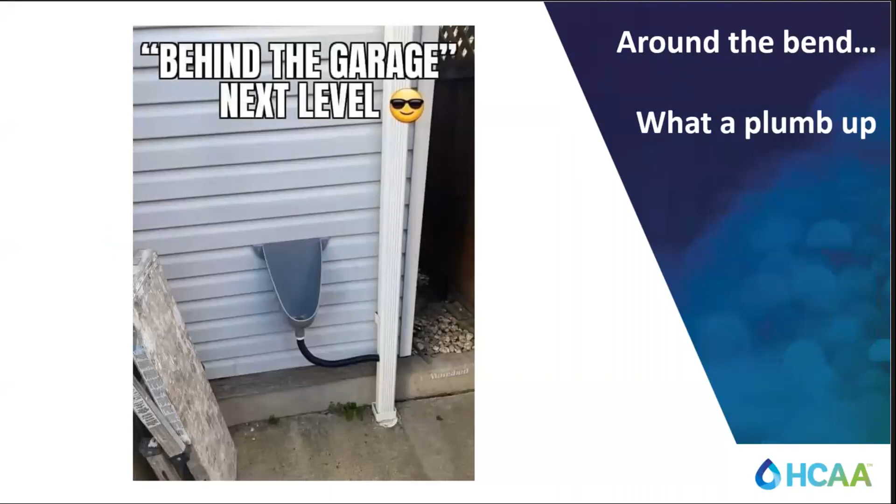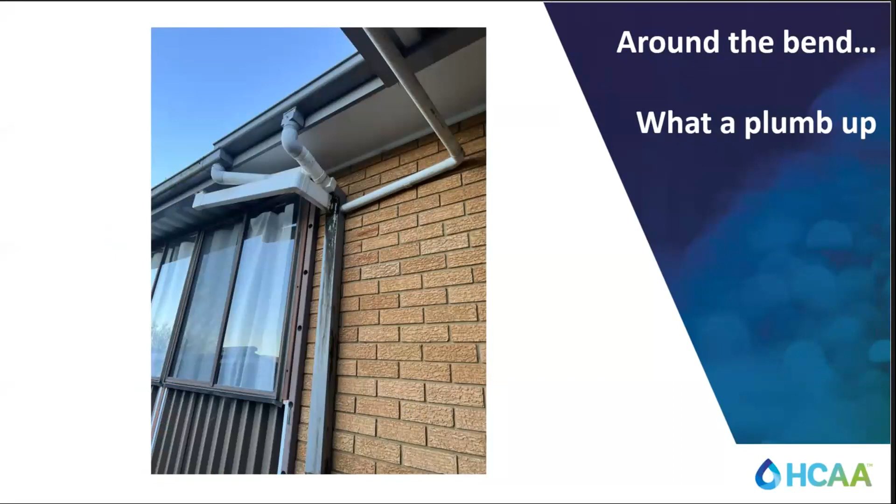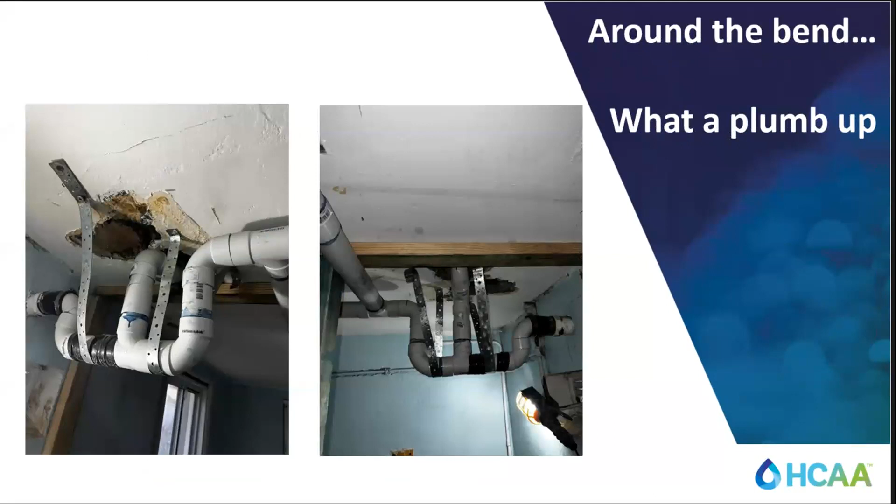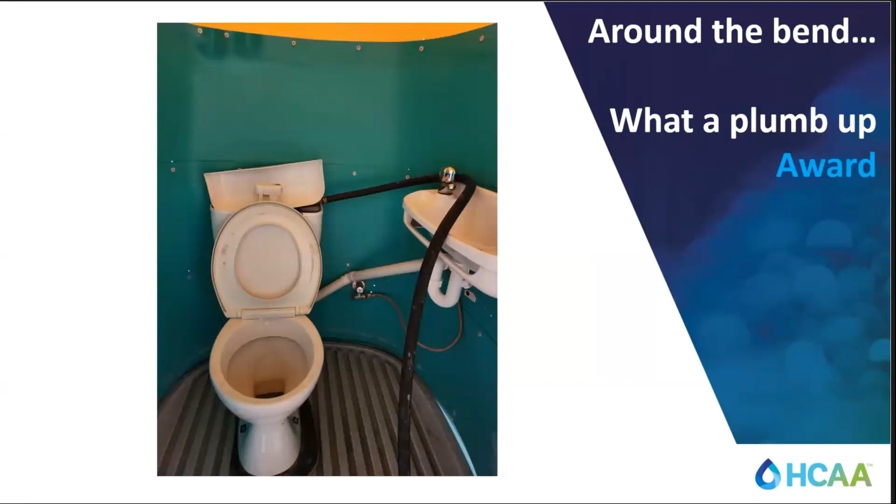You've seen that before, Tom? These are actually real pictures, by the way. And this one's the best. What's happening there? What's going on? You understand what's happening there? There's a little video - hopefully it's going to work.

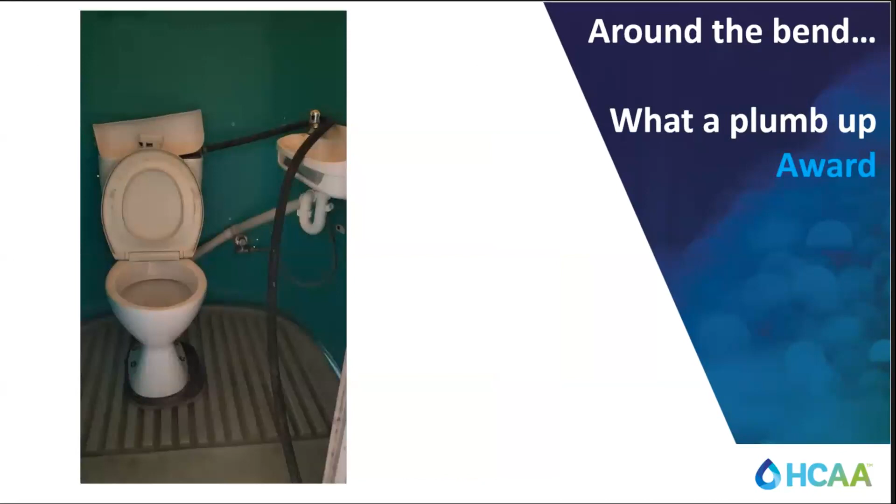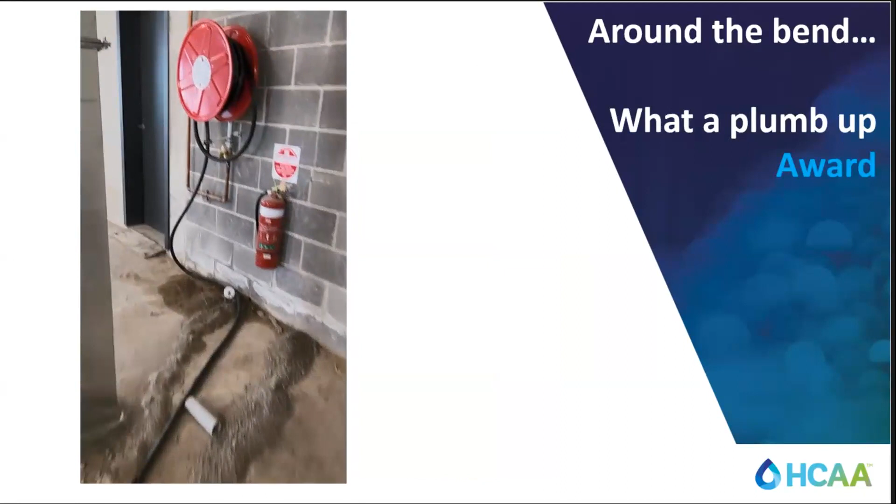Why, as you're topping up the toilet?

Well done, David. I think David's here, isn't he? Want me to get your prize, David? Here he comes. Congratulations, mate. I love the commentary.

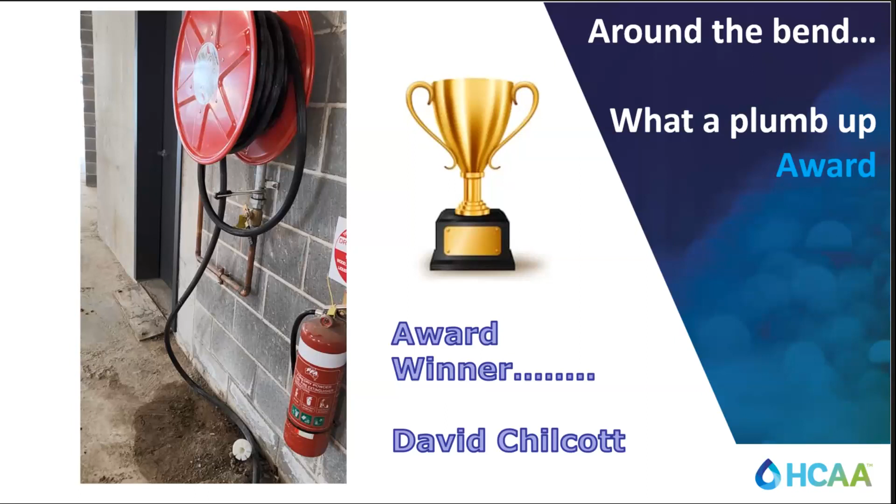Quite close to that. Oh, this one? Yeah, that looks good as well. Okay, oh cool, okay.

We're going to talk about lead in drinking water, what manufacturers are doing, and so on. But first, I think we should look back at the past and see where we've actually come from to where we are now.

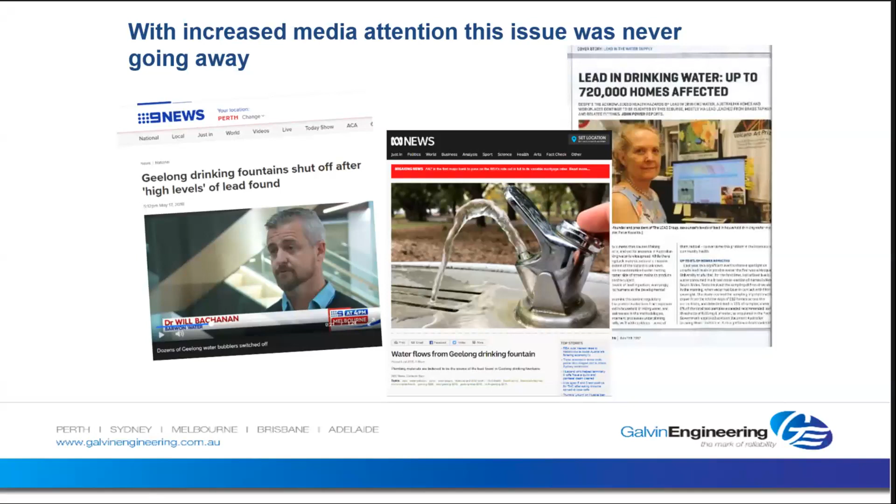So I'll crack on to the next one. You can probably see why. If you look here at an adult, high levels of lead in the water probably isn't going to do a lot.

It's not going to make you feel good, it's not going to make you healthy from it. But for a child under the age of 12, it's a pretty serious deal. That's why you had that VSBA reaction, and schools in particular in a number of states.

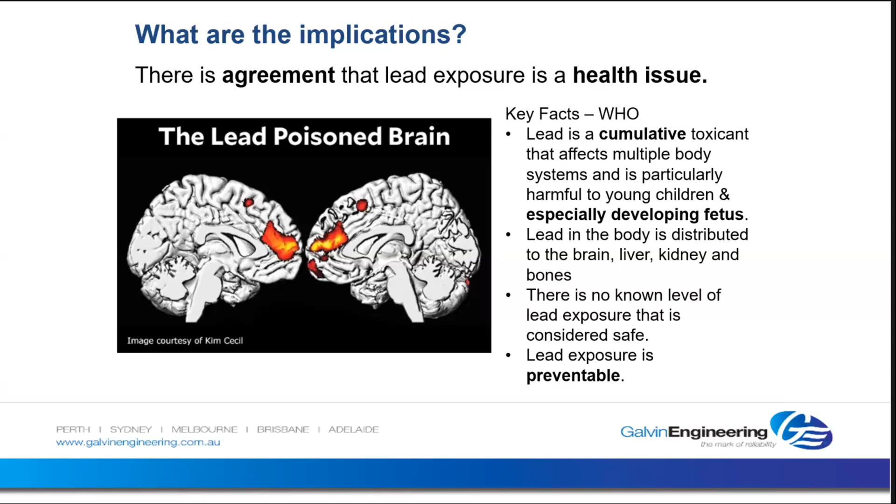So you can see there the brain, liver, the kidneys - basically all your vital organs are affected, in particular the brain. And it's pretty serious for pregnant women as well. So we go over that one, and you can see to where we are here now.

With the ABCB, they formally moved to adopt the lead safe material. Now that happened around about a year ago, maybe a bit longer, but the NCC updated in 2023. So it gives manufacturers around 3 years to get up to date with 0.25% lead in the brass, and also to change - you could use stainless steel as well, which has no lead in the brass.

So it's giving manufacturers 3 years, and you might think 3 years, gee, that's a long time. But when you think of it, Galvin Engineering as a company started back in 2018, so we're 5 years on, and we're still 6 to 8 months away from getting all products fully updated to 0.25% brass or completely lead safe.

And there's a lot involved in it. It's not just a matter of changing the material and then everything's sweet. It's new WELS certification, it's new watermark, it's new drawings, it's new Revit content, it's new product numbers on the website, it's new marketing - it's a whole process.

We now have around 8 people in R&D just working on this, 5 of them at least working on it full time to get all this stuff put through. So it's a huge cost for manufacturers, and I would say that most manufacturers probably - well, we started in 2018.

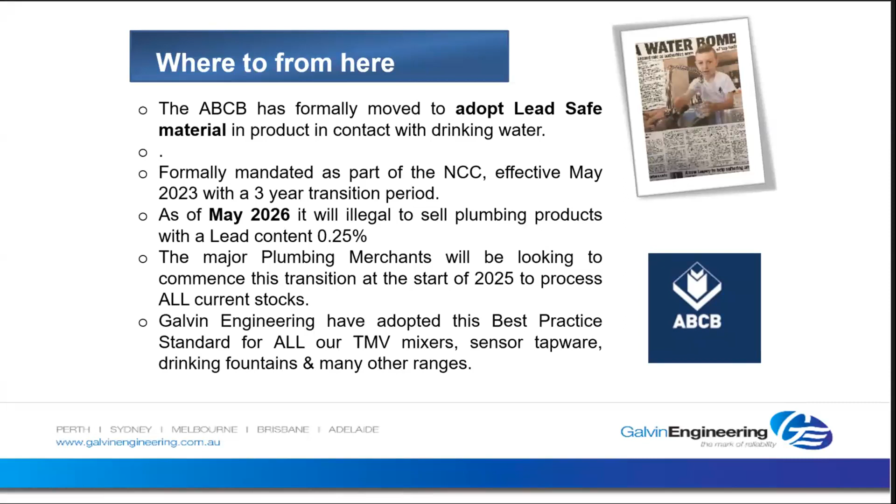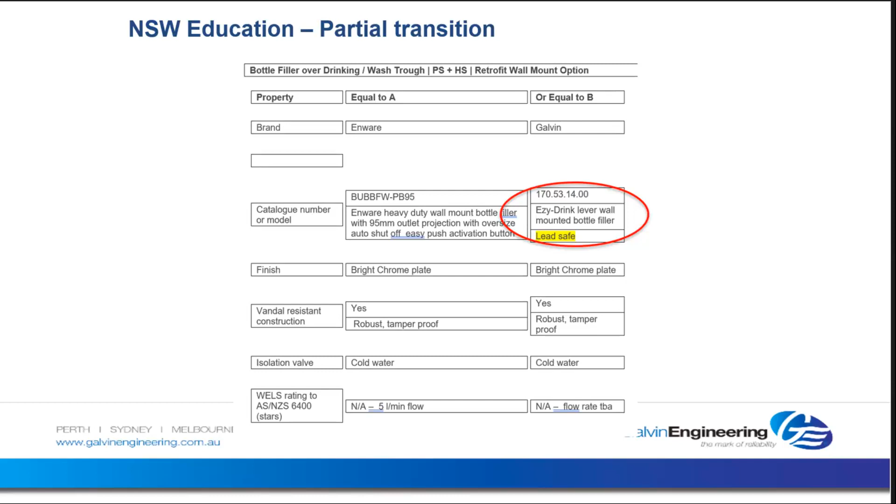New South Wales Education Department over 12 months ago said, yep, let's do 0.25, let's get lead safe wherever possible. If there's a product for it, let's do it. And they've put that in their EFSG guidelines.

It's been around in Europe and North America for decades now. It's only Australia, probably the last of the developed nations really, to actually put this documented in. So with our supply partners from overseas that do our thermostatic mixing valves, they're already lead safe completely. If you look at sensor tapware and that sort of thing that you would get from whatever European country, if it's Germany or Switzerland or wherever, it's basically lead free anyway at the moment.

This is probably a good one to look at, the time frame, which really is what I was talking about before. The 3 years isn't that long a time, especially with specifications of hospitals and things like that. If you look at Tweed Valley Hospital, which we're doing at the moment, my first conversation with SDH was probably 2018, and it's being built now. So that's the time frame it takes to actually get to installation stage.

So I think probably the main - this is so small, Paul - the main part to look at is probably not so much the lower 2023s, but what we're looking at now, and especially in regards to our merchants as well.

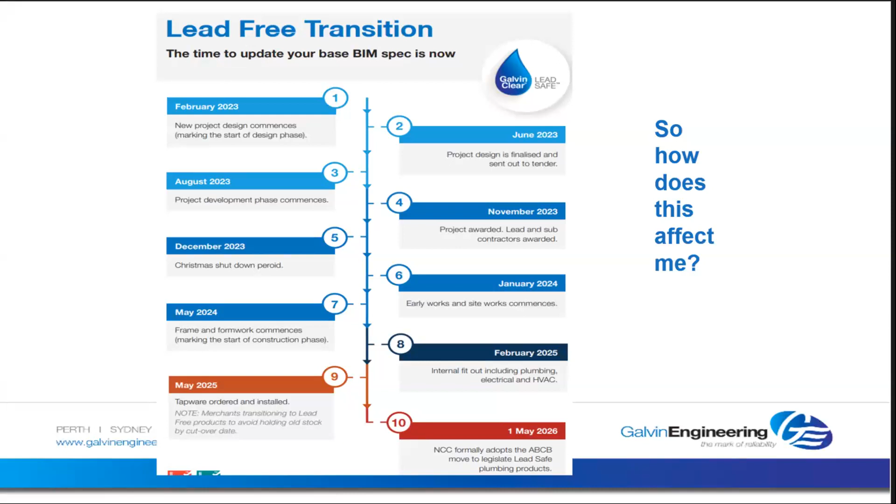Let's crack on to the next one. That's basically what I've been talking about already - the 2018, the NCC 2023 compliant, low lead for DZR brass, and lead-free stainless steel tapware for drinking and hand washing solutions. So wherever possible, healthcare, education, public areas available.

Between all the manufacturers, really, you should be able to get a lead-free or lead-safe product anywhere to fill your specification, even if it's not from the one supplier. You should be able to get a full specification at this stage now, 2023. So you don't have to wait till 2026, to May, and say, oh, I'll switch over.

So that's basically that. We've already spoken about that, and that's how that logo is, David. You see that one there.

So Galvin Clear equals lead safe technology. These are just a few of the product ranges, point of use mixers, TMVs. They're all fully lead safe now.

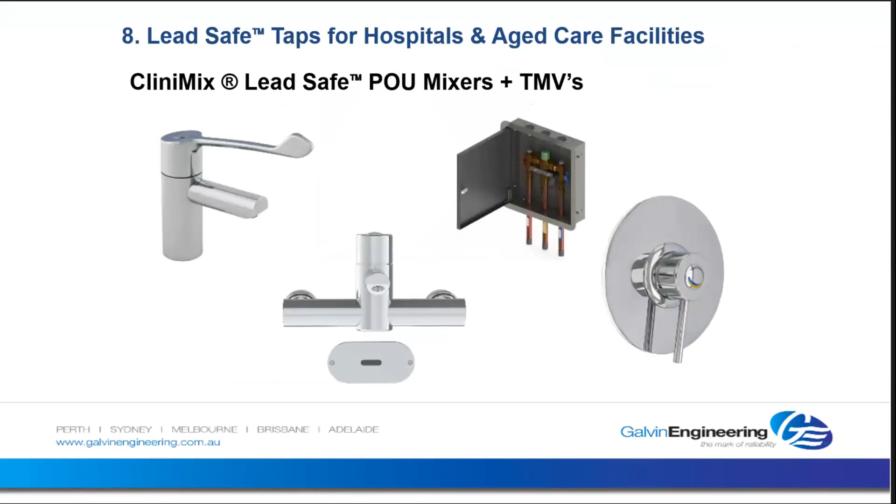And obviously your school pattern tapware was the first bastion we went to. Bubblers, drinking taps, anything in the schools. Went to either stainless - we've got a full range of stainless steel bubblers and things now - but you can also get the 0.25% lead as well in the brass.

Obviously there's a price difference from what we were using now with 4.5%. The lead component of the brass is a softening agent for machining and manufacturing, so that has to be looked at because it's a lot bigger process, a lot longer process now to machine. And even using silicon as well to help soften the brass isn't exactly the same - it still is a longer process.

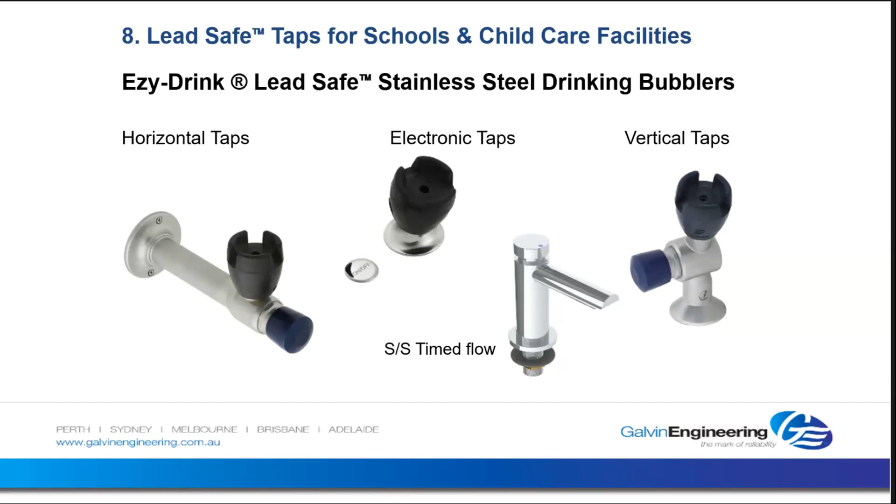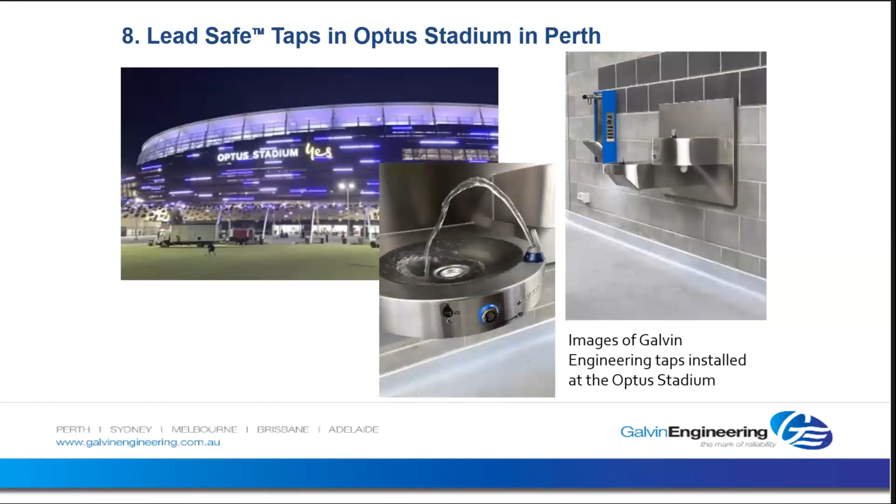Optus Stadium's just a flagship project, which is all lead safe. WA was one of the first states to change over government-wise. It's a standard there, and Victoria is fastly becoming that way. New South Wales is there as well. I'm not sure about South Australia and Queensland, but obviously they will have to change as well.

I'll just play this video for you. So this is just a bit about our manufacturing and our manufacturing processes that you'll see up here.

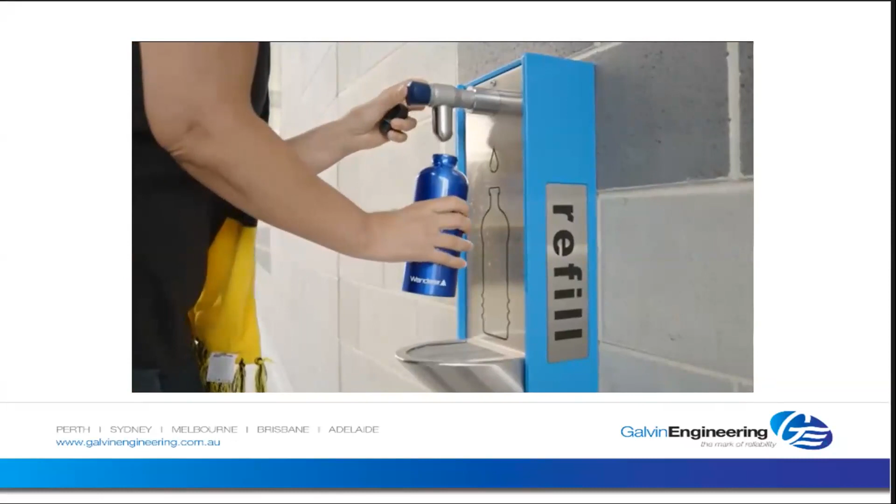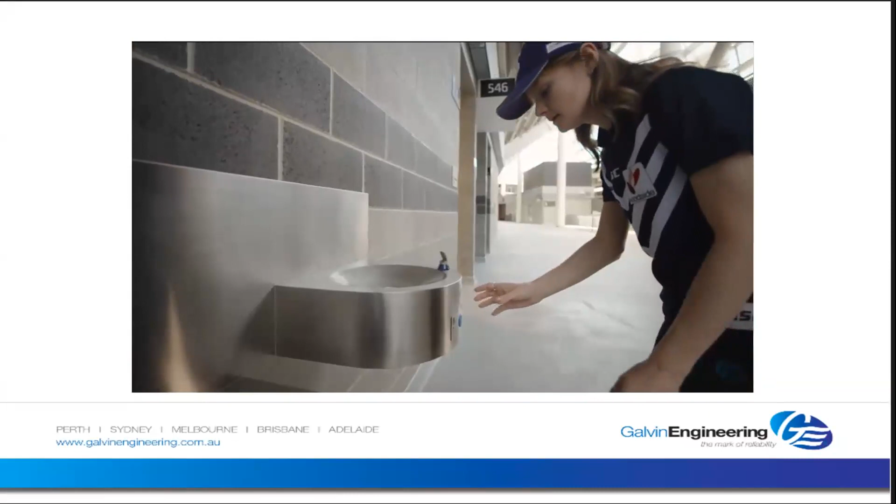Water is one of the rarest commodities, and we really need to treat that commodity with a lot of care. So being able to deliver water in a way that is sustainable, and at the same time having the people that interact with it in a safe way is really important to us. My name is Tim Galvin, and I'm the fourth generation family member to join Galvin Engineering. At Galvin Engineering, we design and manufacture safe, green and smart water solutions. Our purpose is all about designing and making taps, valves, wastes, water management systems that deliver safe water and are safe for the user to use.

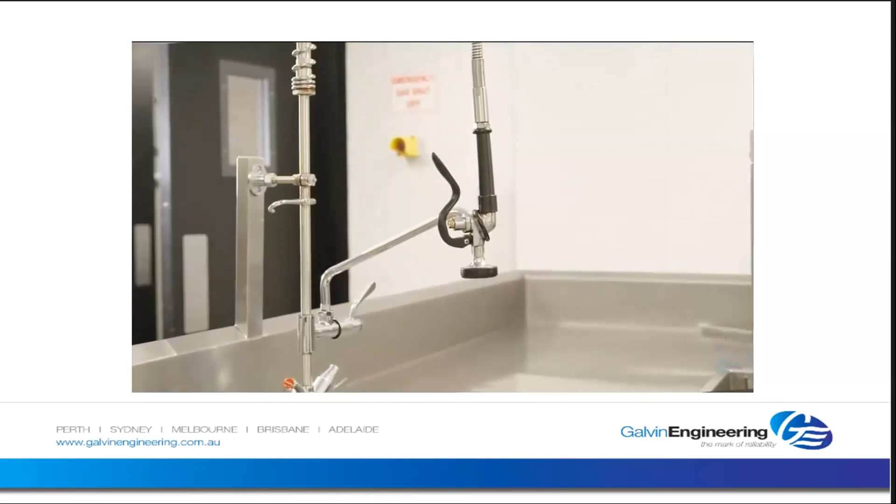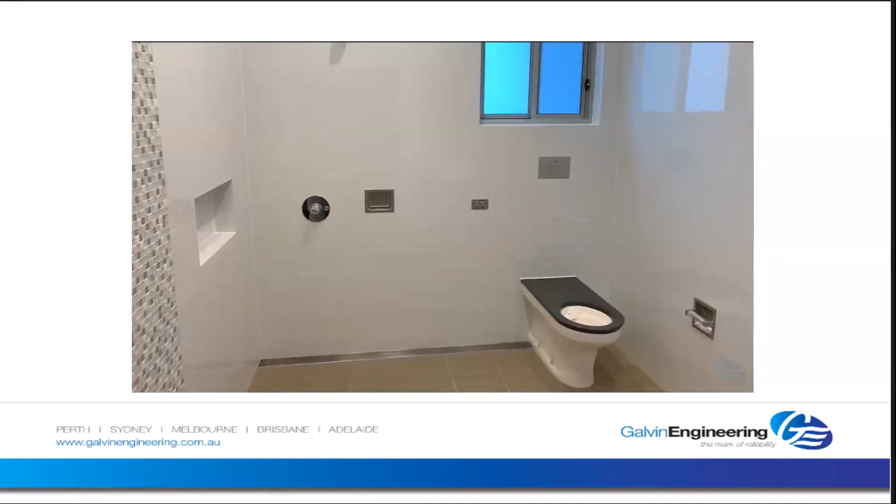The business started actually in 1930. My grandfather, Roy, bought into the business in 1947. I would say we've become leaders in a couple of niche areas, and these are the high care, high risk environments, such as mental health facilities, aged care facilities, hospitals, schools, universities and prisons.

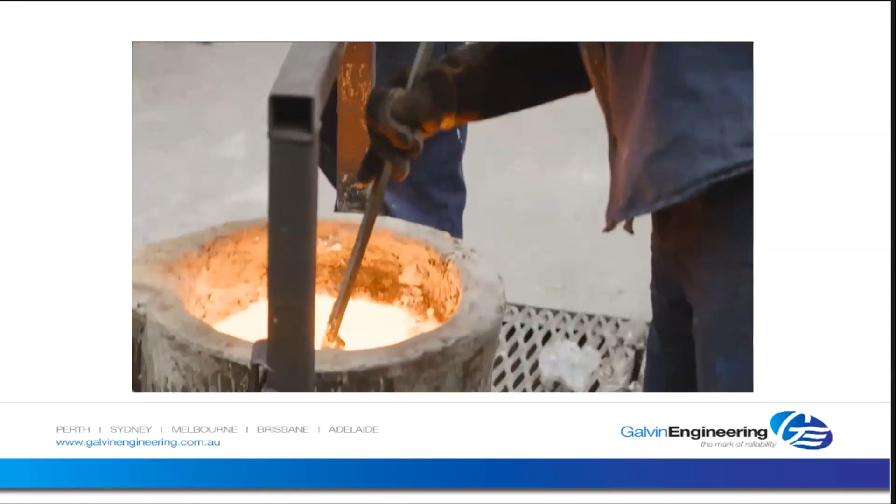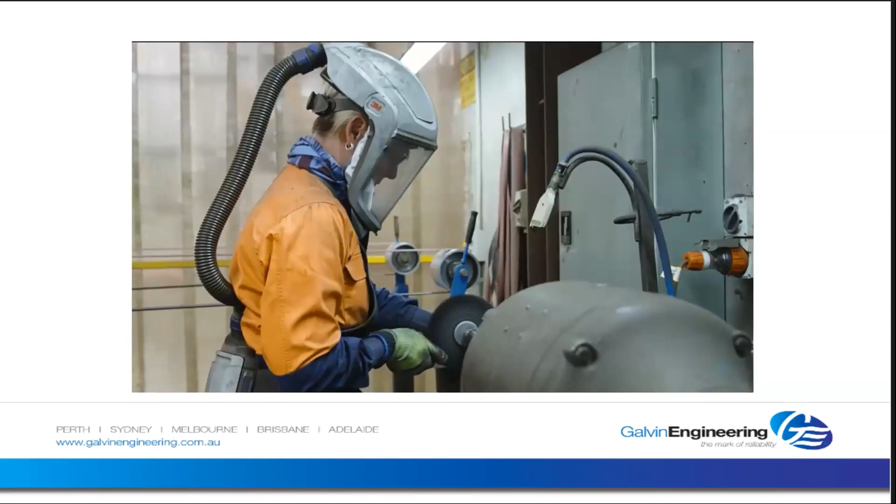I believe our strength as a business is all about our people, and it's all about creating long-term relationships. So we have relationships with customers that are 50 years old. We have staff that have been here over 40 years. I think it's the fact that we are a family. It's about our values, it's about how we do it, and we're doing it in a sustainable way.

Our customers have a lot of trust in our products. It's our logo, which is the mark of reliability, very similar to the Australian-made logo. It instills trust in the products that we manufacture because they know they're built with sustainability in mind, and they're really innovative products. I get tremendous pride when I walk around the community and see our Australian-made products and the benefit that they bring to the people that use them.

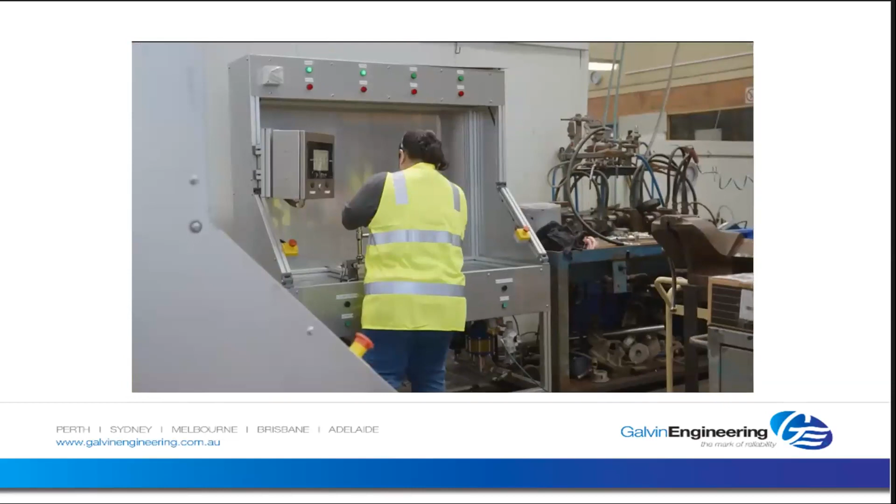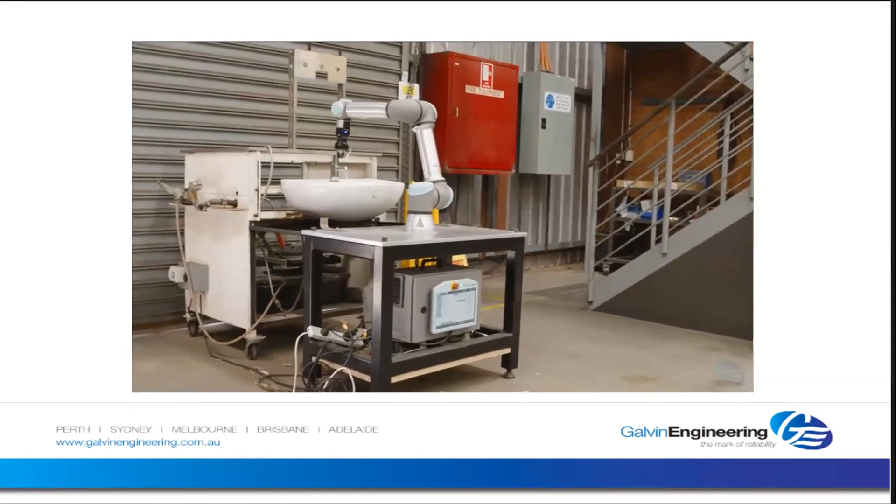It's a really exciting time to be part of Galvin Engineering as we explore how technology can add value to the way we engage with our customers, empower our employees, optimize our operations, and reimagine our Aussie-made products. It's very much about making life easier for users, whether they be in Australia or anywhere around the world. So for me, that's everything.

All right, that's it. That's just the last little bit that was about our factory in Sydney. We're still manufacturing here, and there's no plans not to. We'll continue servicing the Australian market and the overseas markets, and we'll keep pouring money back into Australia and into our workers. Is there any questions on the lead issues and what you've seen?

Do we have questions, Paul, in this?

Do you have a feel for the extra cost that has been imposed now because of the lead-free requirements? And I say that not being curious, but, you know, when comparing apples for apples, if you're 12.5% above a competitor, it sort of makes sense because of that cost to manufacture these goods.

Yeah, when it first came out, we probably had to absorb a lot of the cost to be competitive because we started so much earlier. So it's really hard in the plumbing industry to sell a tap 20% more than our opposition.

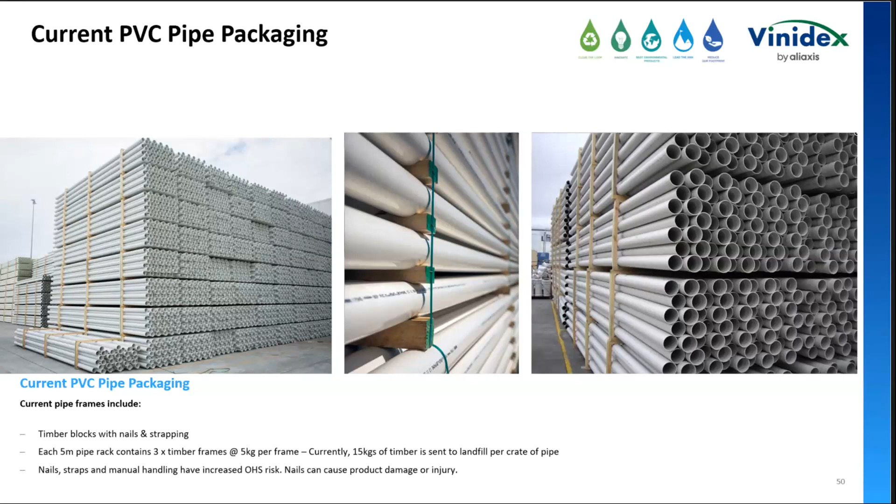So Vinidex's innovation department came out with PVC pipe packaging - well, we make PVC, so it just kind of made sense. There's no nails, no strapping, so it improves manual handling. It's safer to unload, it's safer for our guys in the factory, and it has a simple click lock mechanism.

I kind of wish I had a video - when the Galvin guy was showing a video, I thought he's got one up on me, I should have had a video for everyone. But the simple click lock means there's no hammering, no nails, nobody's going to get cut. It reduces OHS risk, which is a big thing throughout the industry.

Probably the big thing is these frames can be reused up to 20 times, if not more, but the average amount we've calculated is up to 20 times. This is currently being rolled out in New South Wales. If you compare that to the 15 kilos of timber we're wasting, times 20, that's a pretty significant 300 kilos of timber we're saving for one crate of pipe - a pretty significant saving.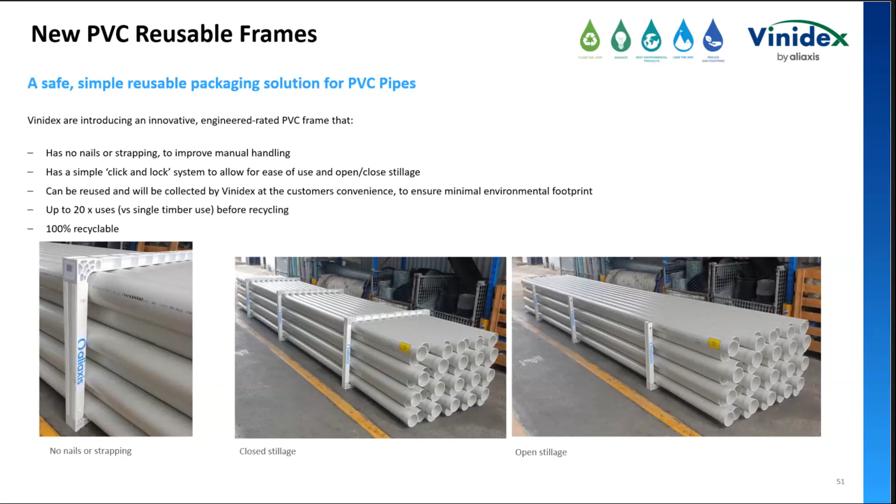And the other big thing, which I'll touch on more with our PVC recycling, is it's 100% recyclable. So we take it back, we recycle it, we put it into new frames, and away we go.

There's a little bit of a flow chart on how it works. It's pretty technical, but I'll run through it with you guys. So we schedule production, we make the frames, the pipe goes in the frames, pipe goes out to our customers, they unload the pipe, and instead of chucking the frames out, they put them to the side or in a safe place. Either we pick them up on their next truck run to their store, or there's a QR code they can scan to request pickup of the frames.

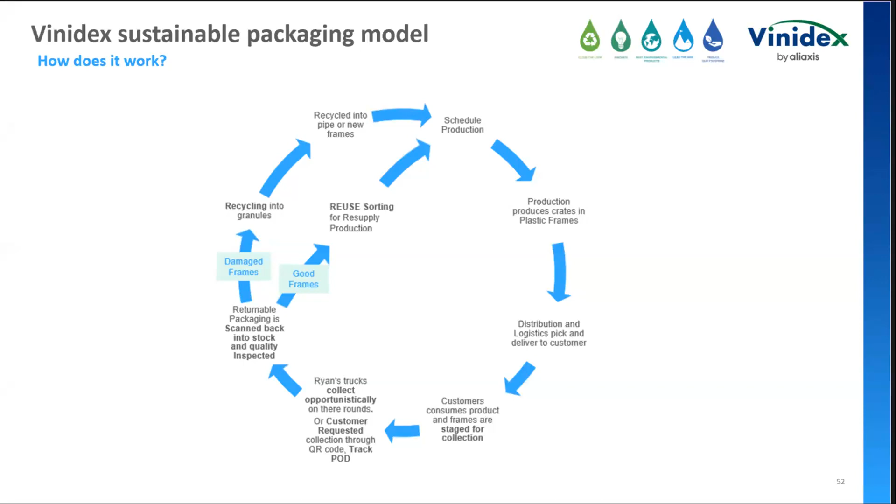Now we bring it back to our factory. Oh, they've been run over with a forklift - what do we do? We crush it down, we reuse it, we recycle it. Oh, they're in good condition - bada bing, bada boom, same day, put some pipe in, send it out the door, and away we go. Pretty good, pretty good.

The other initiative I'm pretty excited about, which we're successfully rolling out in New South Wales, is PVC recycling. Before I came to Vinidex, I thought plastic's the devil, we're trying to save all the turtles from the straws, and plastic gets a bad rap with single-use plastic. But just for your knowledge, PVC has a 100-year design life.

And what we think - and nobody can prove us wrong because this will be much further in the future - is that we can recycle the resin within PVC up to 6 times. So in a perfect world, that's 600 years of use of PVC resin.

So Vinidex has partnered with some plumbing merchants, and our recycling initiative is underway in New South Wales. We supply crates to these plumbing merchants. The plumber comes in, chucks his waste in the bin. We take it back to our factory, we crush it down, we recycle it, and we put it into new products.

Currently, the recycled resin we use is only used on the internal layers of the pipe, with the outer layer being virgin, unused resin. We don't discriminate - we'll take anyone's PVC, same with our poly recycling, which is our PE. We'll take anyone's MDPE, anyone's HDPE, and we'll extract that resin and reuse it in our products.

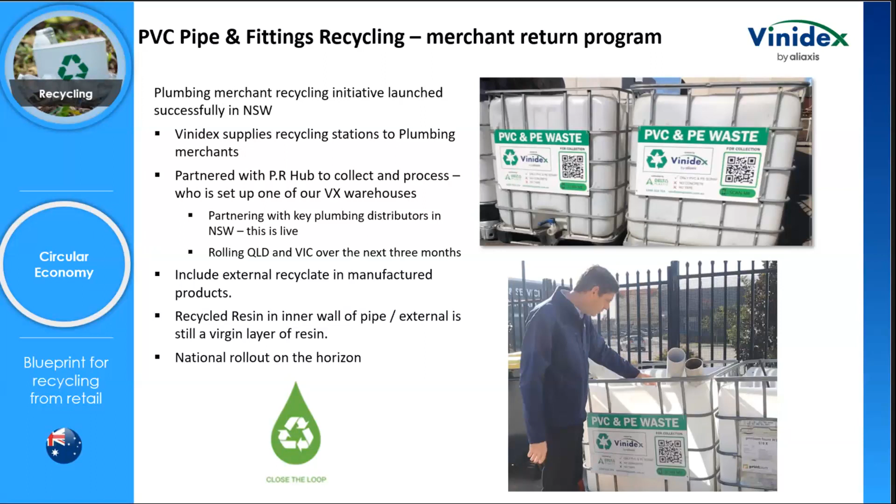And just finally, I've got a couple of happy snaps. There's a bunch of scrap pipe - we bring that back to our factory. It goes through a machine and gets crushed down into aggregate. The aggregate goes through another machine where it's crushed down again further, into a fine aggregate, which is then melted down and cleaned up. So it doesn't matter if it's got glue and dirt and sludge and whatever else goes on in the ground - we take it back, clean it up, extract the resin, and reuse it.

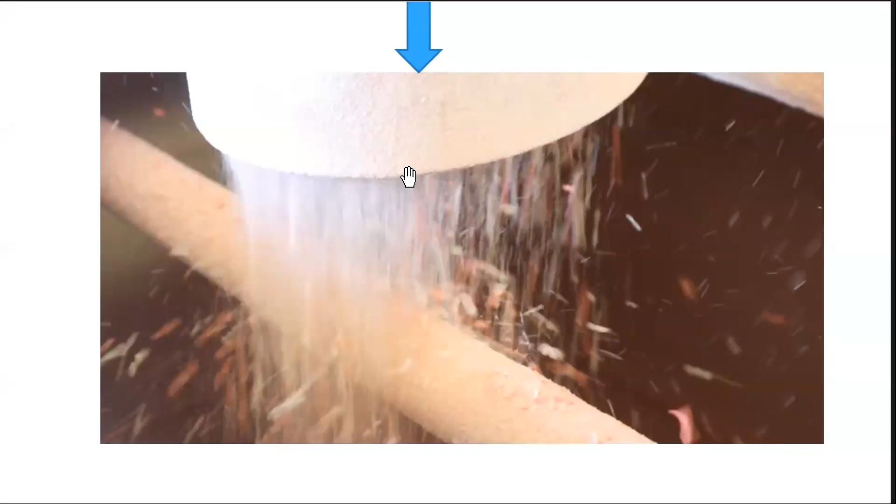So thank you for having me. Those are just some of the initiatives we are currently doing. If I haven't been to your office, or you want more information about some of our other innovation in the space, please reach out.

Fantastic, thank you very much, Chris. So Dave said Lena's not getting the microphone. A question - oh, I thought I'd sidestepped it.

Potentially on some of the larger sites, you could put little crates there, because plumbers, like most people, are lazy, and would rather put it on the back of their ute and drive it to the next Reece outlet and dump it there. It's hard work. So, anyway, congratulations, well done. Whew, got off lightly - thanks, guys.

The simplest solutions are always the best ones, yeah? Don't go away, come back.

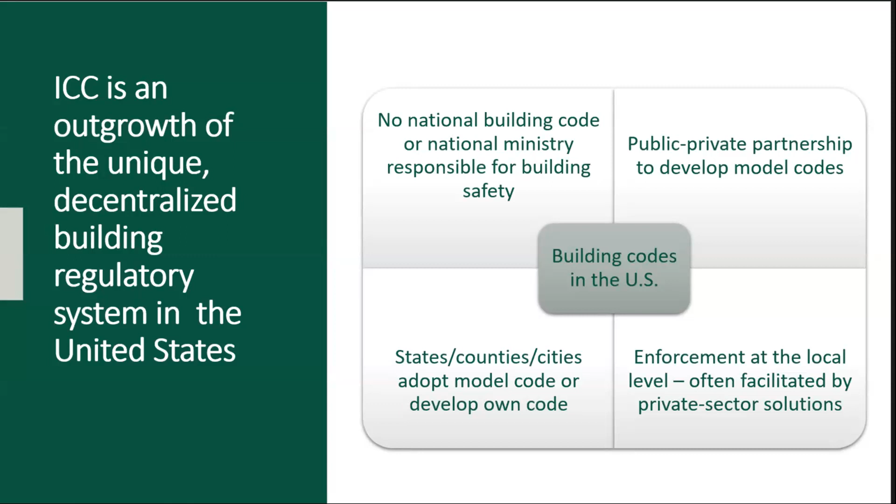Enforcement is at the local level, often facilitated by private sector solutions. So whilst not so relevant to this audience, if I was talking to a group of building surveyors - in America, it's all done by local government building officials. In Australia, it's done mainly by private certifiers, with local government overlay, state government regulator overlay.

So very different systems. The ICC model building codes are used by jurisdictions around the world. And they're unlike our code and the New Zealand code, where we have 3 volumes, but basically all of the subject matter is contained within those 3 volumes.

In America, they break the I-codes out into subjects, so each volume is a subject. Fire is a subject, plumbing is a subject, and as a result, each of those is a volume in its own right. Why is that of benefit?

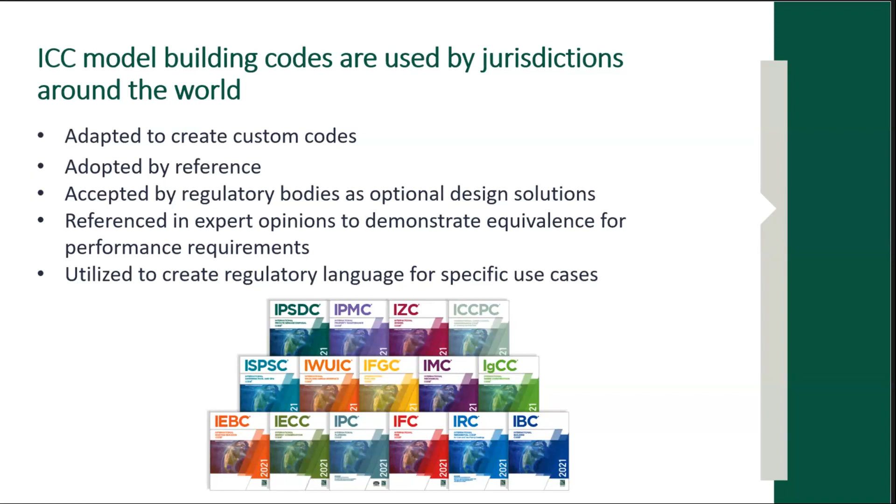Particularly for those who operate in America where you're paying for your codes, whereas we've made the codes free in Australia, it means you're only buying the code that's of use or relevance to you rather than buying the whole code. In Australia, when we used to charge, back in 2016, if you were buying the plumbing code, you actually had to buy the whole National Construction Code. So it's a different way of doing things.

But I thought these 4 volumes might be of particular interest to this audience. So amongst those 15 volumes, you've got the International Plumbing Code itself, the private sewage disposal elements, the International Fuel Gas Code, and the last one, buildings and facilities. For instance, they've got a maintenance code, so that last one actually factors into their maintenance code, which we don't have in Australia.

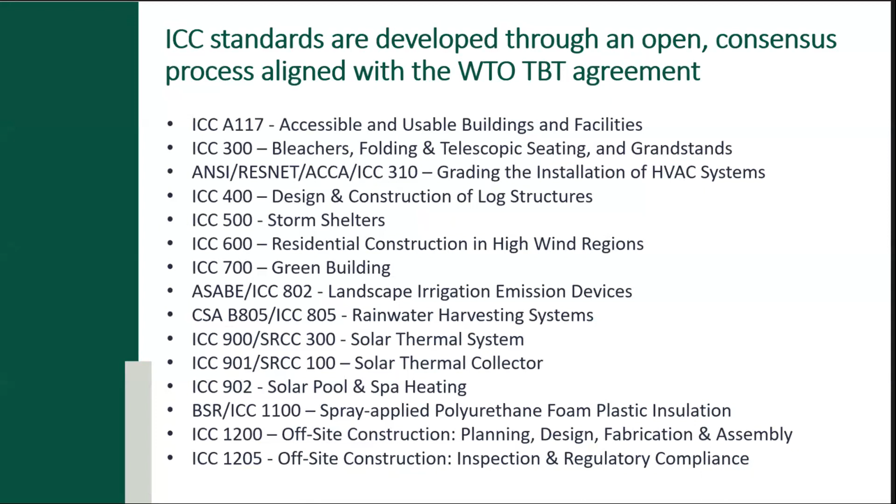Now I'm putting those up because when you get to this, you start to see the sorts of standards. Most of these are not plumbing related, or hydraulic related - I'll come to that in the next slide - but it gives you a sense of the broad aspect of areas these guys are involved in.

But where PMG - plumbing, mechanical and gas - is of particular interest to the ICC is that they've created a centre of focus. They've now made a decision that in an international environment, they want to take a lead and be a thought leader in the space of plumbing, mechanical and gas. Through that, they've identified 4 areas.

And it was interesting to hear in that earlier presentation about electrification - that is one of the areas they have a particular interest in, in terms of developing certain standards. One of those that might be of interest is the standard for sizing water distribution.

I think, Tom, I'm right in saying - and if you know Ross Wakefield at MBIE in New Zealand - they're both on this committee. So what ICC does is invite international participation onto its committees, such that they get to learn from what's happening elsewhere in the world. I know for a fact that on this particular one, they're particularly interested in the work the ABCB's been doing in this space, but it also means there's potentially a greater prospect that their standard might get picked up somewhere else on an international stage.

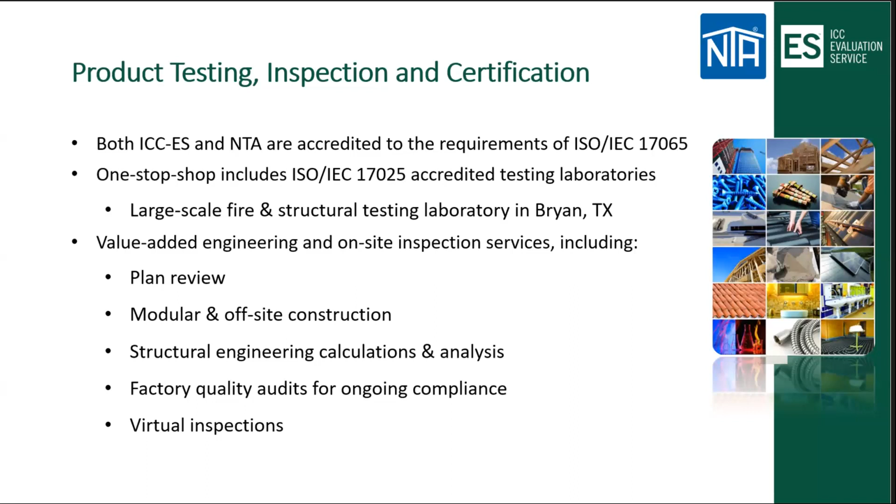They do plan review, modular offsite construction, structural engineering calculations, etc. So they're a pretty diverse group. They also do code consulting. So if, for instance, someone looked at the International Plumbing Code and said, that actually interests me, that could be a solution to my problem, you can actually talk to ICC to get them to do some of the consulting elements of that for you.

So that's the pitch, but hopefully there's also some useful information in there for you around the International Code Council. Here are my contact details - we've set up an Oceania office. I'm in Canberra, and there's a couple of web links there to Oceania and global services. Happy to take any questions.

Thank you. Fantastic, Neil. Congratulations. Put your hands together for Neil. Got their congratulations.

We're just looking at online questions as well. And while that's happening, there's just one down here. Tom's going to rush to the front. Go, Tommy, run.

Sorry, it's a sensible question. Thanks, Sam, that was very insightful.

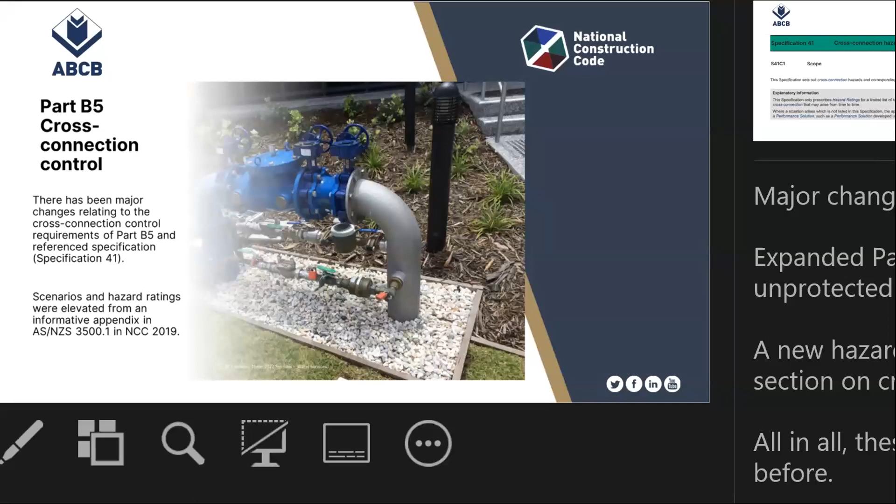What you'll find is a lot more guidance through the whole code as well, giving greater guidance than before on how to interpret the DTS requirements.

First one is Specification 41. In the National Construction Code, if you see something called a specification, it is a mandatory part of the code - that means whatever's in Specification 41 is deemed to satisfy, and it must be complied with. As I said, many of you will remember AS 3500 Appendix F, in 3500 2018 I think it was, where there were about 50 or 60 backflow hazards listed in an appendix with the backflow protection requirements required for those. Well, that disappeared in the 2021 edition, and now it's been replicated, rebuilt, redefined and evolved as part of NCC 2022. That is Specification 41.

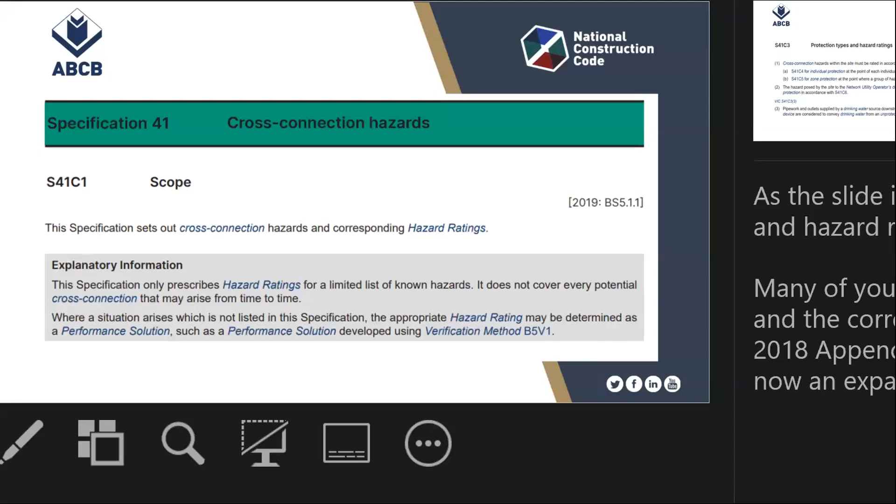It still covers areas like individual protection, zone protection, and containment protection. Each of those areas are covered in specification 41.

You'll notice in clause 3 that we talk about unprotected drinking water. In the past, people have put on a backflow prevention device and called the downstream water non-drinking water. That's not the case, and some parts of Australia paint the pipes purple. It's not recycled water, but it is unprotected drinking water. The water that goes through that backflow preventer is still drinking water.

It's only when it's cross-connected to something that it becomes a contaminant. So while it's not cross-connected, it's unprotected drinking water. Industry has been struggling with this for a while because 3500 calls it non-drinking water, but the code now overrides 3500, as you know, and it's unprotected drinking water.

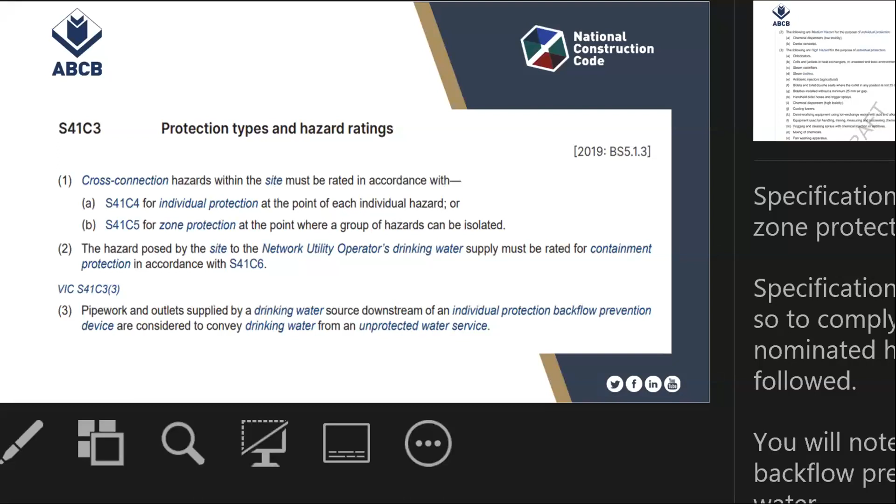This is an excerpt from specification 41, and this is how it looks when you look at it. You'll see the hazard ratings applicable to particular products in the actual individual application or zone application, etc. There are some good old friendly bidet douche seats and those sorts of things that everybody has fun with, and now there's really hard and fast specifications around the backflow requirements for those things.

Specification 41, as I said, is a mandatory deemed-to-satisfy requirement. So no matter what the manufacturer says, even if he says my product has integral backflow prevention and it's protecting this product, if specification 41 says it's still a high hazard, it still needs high hazard protection. No matter what, the only people that can overrule the Plumbing Code of Australia are the regulators themselves through their own local ordinances and acts.

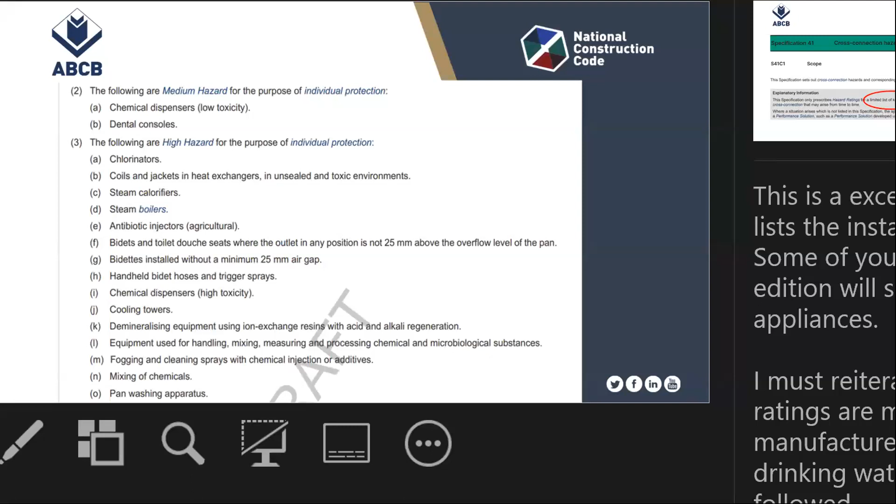However, there is only a known list of hazards in that list, about 100 of them I think, and there will always be something else that comes up, an innovation of product or something like that.

Plus also the code covers not only actual backflow prevention applications, but also potential cross connections. So bear in mind that if you're putting something within 18 meters of a high hazard application and there's a fire hose or a normal hose tap there, it could be a potential cross connection. Bear that in mind as well.

But like I said, in the fast moving times of innovation, how many times have you come across or heard of an appliance that says we've got backflow prevention? The plumber or installer, in a lot of cases, can't get into this product, so he can't tell. So that's the whole idea of specification 41, to take a lot of that guesswork out for the installer and for the owner of the product.

But as I said, there are myriads of applications now that aren't on that list. So we developed this hazard matrix to assist in the performance solution side of it, to identify what the hazard of a particular application may be.

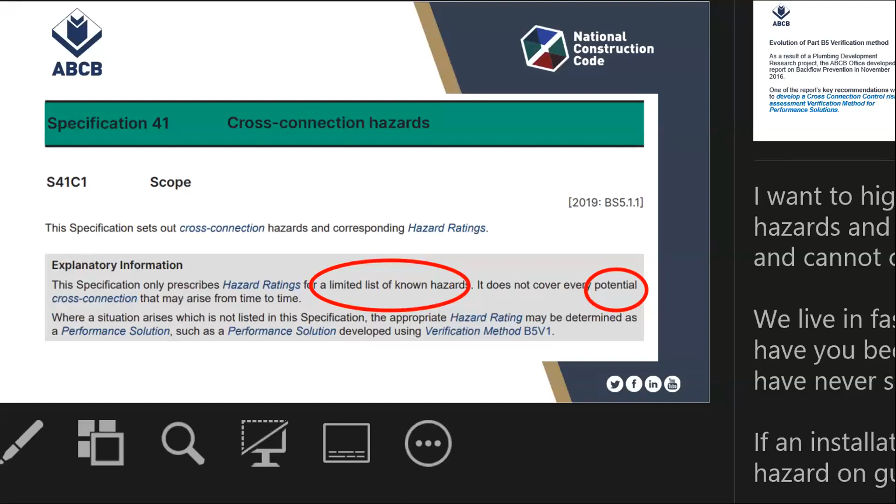This evolved from a recommendation out of 2016, which identified that backflow provisions needed beefing up in the code, that it needed greater guidance and more identification so that people could make it easier to understand and easier to interpret.

The confusion relating to a risk assessment of a specific application causes disagreement all the time. It's the regulators who will disagree with the installers, who will disagree with the owner, who will disagree with the manufacturer. So this risk assessment matrix is there to bring that into line, so that there is not a single source of truth, but something you can hang your hat on and say we worked our way through this risk assessment, and this is the reason we got for these reasons.

The problem with people having so many different interpretations is that an installer will install a product, the plumbing inspector will come along and say it's wrong, pull it out. So it's cost, it's time, it's stress, and it's grief. Hopefully some of this can be sorted out through using this matrix.

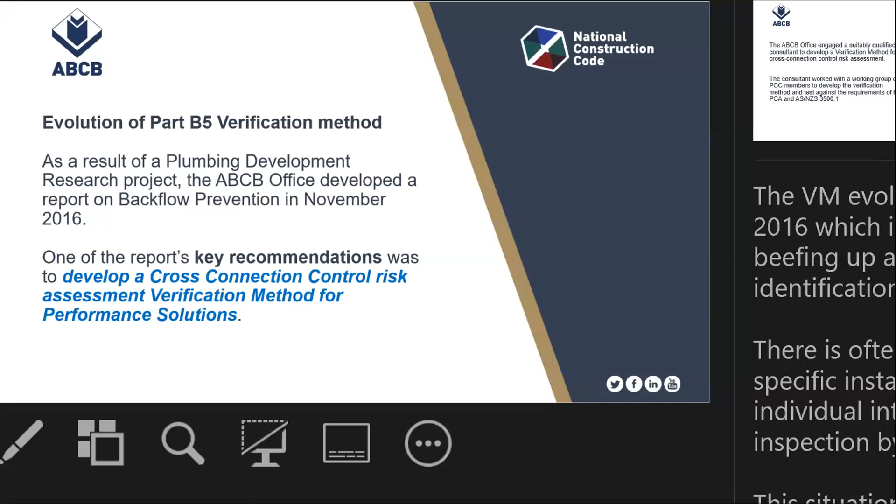We engaged a risk consultant to develop this. This was consulted across the country extensively, and we consulted lots of areas. We had the Backflow Prevention Association of Australia, each state and territory regulator, Standards Australia WS23 committee, which is the backflow standard, a special cross-connection control working group that we put together, and WSAA were involved. So we had lots of people involved with this that went through each iteration of this matrix to identify whether it worked, where the hiccups were, and what didn't work.

And so that's when we came out with this. Even before we started publicising that we had this, it was tested extensively around Australia.

It was developed and intended to be used as a tool to assist in identifying the cross connection. It's a performance solution tool so the installer can meet the performance requirements of Part B5, which require that water be protected against contamination. Anywhere drinking water is connected to a machine or similar, there is a risk of contamination. So performance solutions are provided in the code as alternatives to the deemed-to-satisfy provisions. As it's a performance-based code, if you can identify a performance way to do things that's acceptable to the regulator, that might be the option at the time.

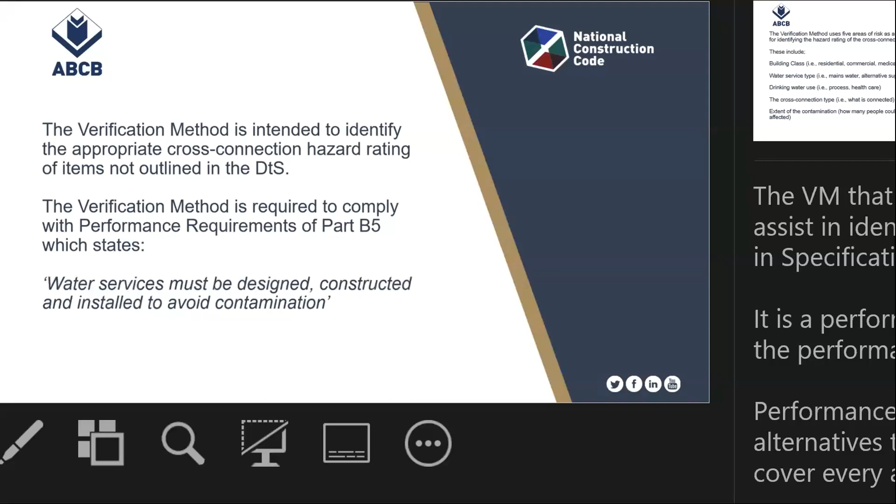It's a really easy to follow 5-step process, but there are some rules involved. It includes building classes. Now, a lot of plumbing practitioners don't understand building classes. They might know that a residential house is Class 1, but unless they're doing it all the time, they don't talk building classes.

The National Construction Code, across its three volumes, talks about building classes for all practitioners, whether it's plumbing, carpentry, drainage, building, or fire - they all talk building classes. So we're including that building class as well.

We talk about the water service type. Is it mains water? Is it an alternative supply? Alternative supplies can be rainwater, it can be recycled water, it can be a dam. So there are lots of different types of water services.

What is the drinking water used for? Drinking water is the water provided to you by the network utility operator. So what is that water used for? Is it for drinking? Is it for process? Is it for healthcare? Is it a mix of both? Is it a food manufacturer that uses it?

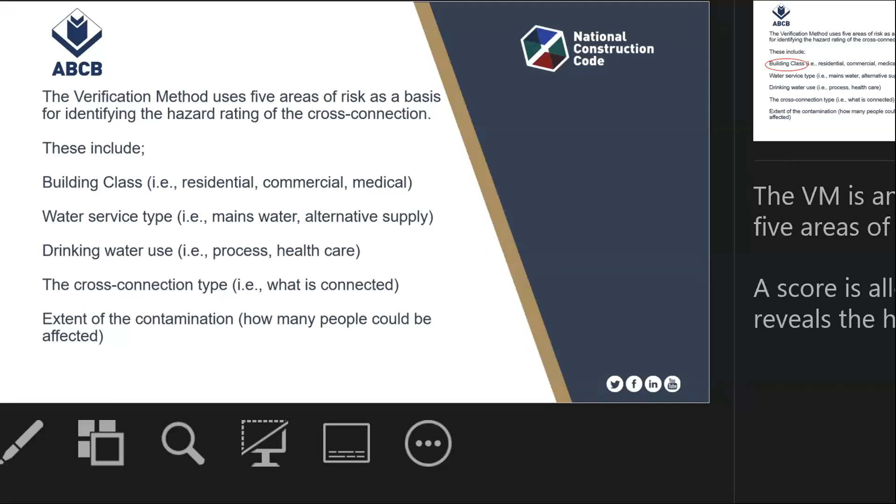What is the cross connection type? What's it cross connected to? Is it this machine over here? Is it a tap with a hose on it? You have to understand whether it's a temporary cross connection or a permanent one. Then we talk about the extent of contamination - how many people could be affected if there is a cross connection. So to work through this matrix, you have to understand the installation and what is happening in that installation.

A couple of things here. Building classes - like I said, we find that people don't understand building classes, and that's part of what we've got to do at the ABCB, is to encourage plumbing practitioners to learn what a building class is and where they can go to find building classes.

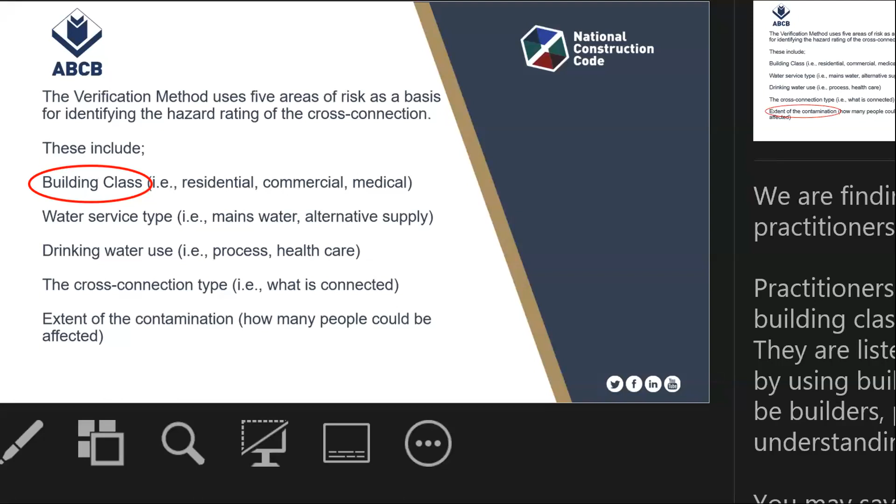People do say that it doesn't matter what building class it is, plumbing's the same - you still join that piece of pipe, pipe up the tap, put the drainage to the sink. Yes, it's still the same, but things have to be addressed differently in certain buildings, like heated water in childcare centres or hospitals. So there is an understanding requirement of what sort of building class it is.

Another thing of interest in the matrix we put together is the extent of contamination. Any backflow or risk assessment matrix has a likelihood and consequence equation to it. The construction of this risk assessment identified the extent of contamination: up to 12 is one level, 13 to 100 is another, and 100 plus is another. So 1 to 12 is generally a house, a residence, a small shop - that's the amount of people that may be affected if there's a cross connection and backflow incident. 13 to 100 is multi-residential or smaller mixed-use properties, and 100 plus is high-rise, shopping centres, etc.

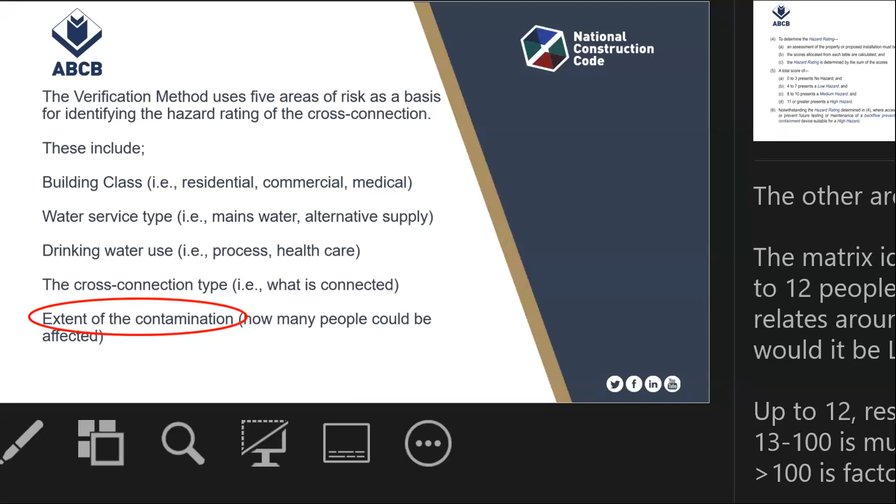One issue raised now across the country is with network utility operators, in so much that they don't care how many people - let me step back from that, they do care - they don't care whether it's 1 or 100. If there is a cross connection, that is the extent of the contamination. So this is something we're taking into account for the next iteration, because if there is one person liable to be affected by a cross connection, that network utility operator says no deal - that cross connection has to be protected, and that level of protection must be greater than what this matrix may suggest.

So once the scores are all summed, you go through those 5 things against an exercise, which I'll run through in a minute, and sum the totals, and you get the applicable hazard rating.

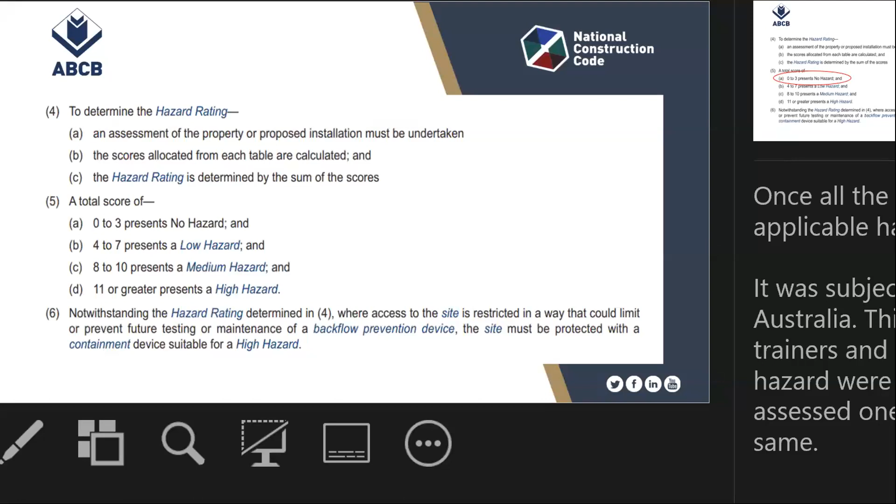As I said, this was subjected to extensive testing across the country. The bands are pretty wide when you look at that 0 to 3, 4 to 7, 8 to 10, and 11 or greater. And what that allows is different interpretations. If I could say to someone in this room, run this through the matrix, and they will get an 8. And I'll say someone else run it through the matrix and they'll get a 10, but it still falls within that same band. So we tested this significantly and extensively across the country, and in all cases, there was satisfaction that it led a particularly consistent level across the backflow requirements.

But this is an anomaly. By using the matrix, you won't be able to score a 0. There is no such thing as no hazard. If we're talking about cross-connection control, and we're talking about potential cross connections, that means there's a hazard. The only time we'll never get a cross connection is if there's no backflow hazard, if there are no cross connections whatsoever, and potentially that's unlikely to happen. So the code's talking about cross connection control. Using the matrix, you'll never get a 0.

Okay, so what we got, like I said, is an easy to follow guide that practitioners can easily navigate. It allows the regulator to look at it and say, yep, I can see where you're coming from. I understand what you've got.

But this matrix, like I said, I have to reiterate, it is only for areas that aren't covered by that specification 41. It cannot be used to try and change a hazard level that specification 41 says. So if it says it's a high hazard, you run it through the matrix with your biased rose-colored glasses on and come up with a medium hazard - doesn't work. The code says it's still a high hazard.

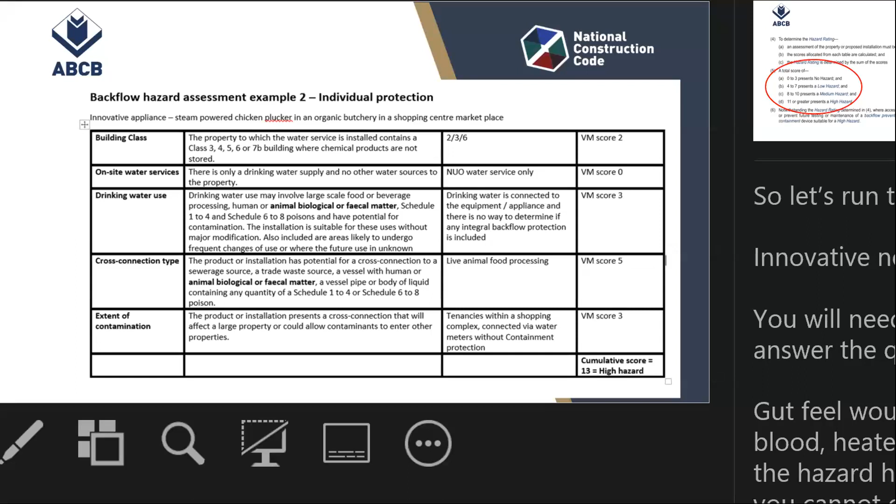Once they're summed, go back to that list and see what it is. You'll see 11 or greater presents a high hazard. You can therefore confidently say to the regulator, to the owner, whoever, I've run this particular product through this matrix, and I can put my hand on my heart and say I believe it's a high hazard because it meets this matrix. No longer is it gut feel, no longer a biased thought, no longer an unbiased thought that says I want to sell more of these products. You've got something you can use as almost evidence to show that you've assessed this product and this is the level you've got.

We need feedback as we develop this code, as we develop this verification matrix. As you saw, that was its first iteration. It's been tested extensively, but it's people in the industry who understand what they do day-to-day that will help us go forward further. There are ways you can do that, by contacting us directly, through our website, or through performance proposals for change to the code. If you know something's not working, if you don't think it's working, talk to us, because the codes are developed for you people, by you people. We sit in Canberra and put these together with consensus through the regulators, but we do it for the practitioners. So if there's something of particular grievance out there, or that can be done better, we want to know about it.